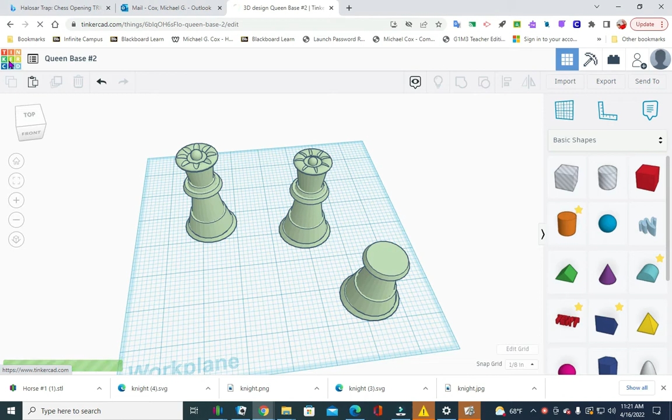We are going to work on our queen base today. I know some of you call it king base, queen base, but both of them are going to be the same base. So I'm going to go ahead and start by creating a new design.

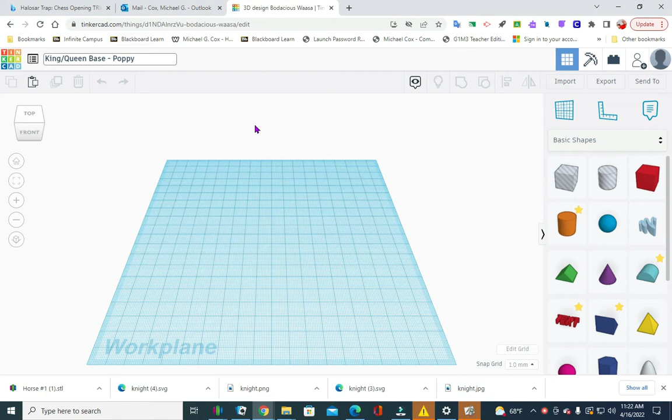I'm going to put king/queen base, and I'm going to put my name, Poppy. You guys go ahead and put your own name. I know some of you will still put Poppy - I don't know if you're being smart or just following instructions. Alright, next thing we're going to do is change the grid from millimeters to inches.

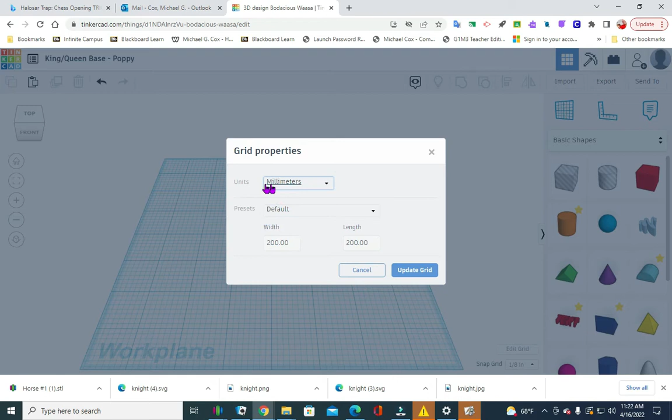I don't understand why this seems to be so difficult for some people, so I'm going to just show you again. I'm going to come down to this corner of the workspace, click on Edit Grid, change it from millimeters to inches, units inches, update.

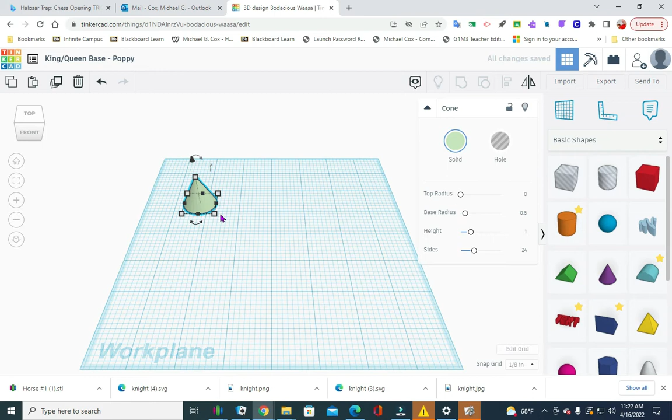So the first thing we're going to do - now I've been making adjustments to this as I go along. Each time it seems, when I print it out, I notice some things we could have done better. So I'm going to pull out a cone, change the color to a lighter color because it's easier to work with, and change the X and Y parameters.

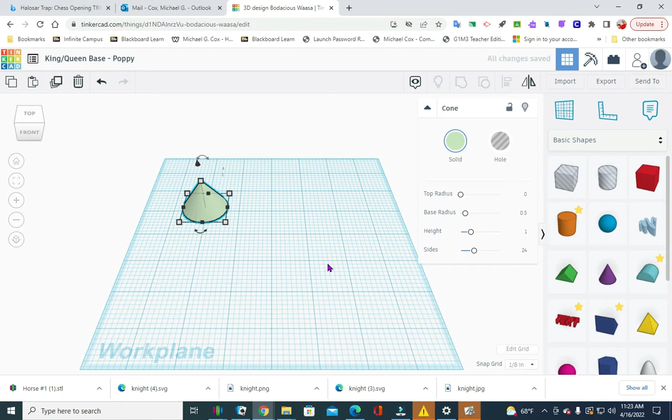to 1.375, 1.375. And I'm going to leave that there, I'm not going to change the Z-axis.

I am going to pull out a hole cube, the transparent ones. I'm going to hold my shift key - I've learned something new, that if you hold your shift key and move one of the parameters, it changes at equal amounts. So now this cube is actually all the same size without changing all three of them.

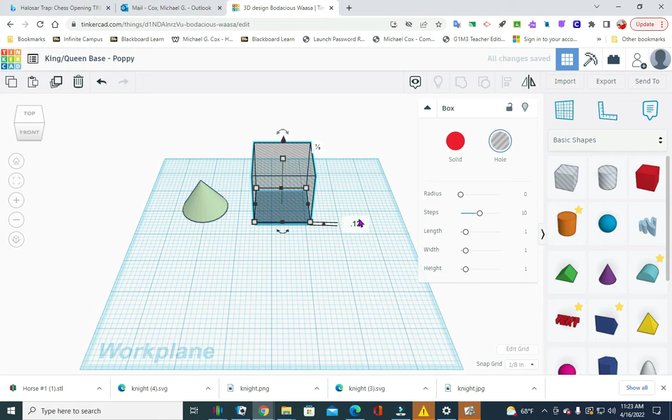I'm going to raise it up 0.125. Right now, I'm hoping that you know how to align. Make sure your handles are off. I'm going to put the two pieces pretty close together.

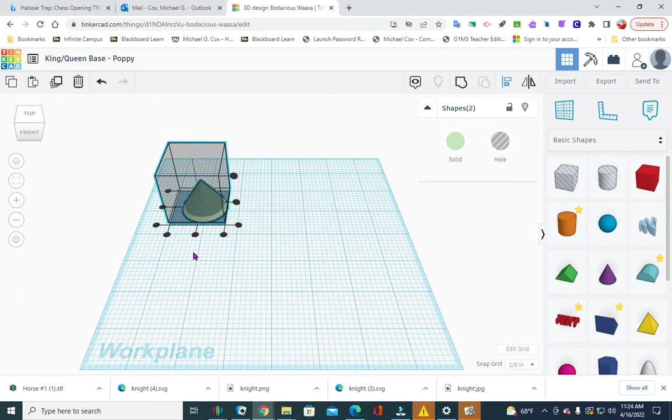I'm going to drag a rectangle over it. Remember, you don't have to make the big rectangle to get it all, just a small skinny line that goes through both of them. I'm going to click on align up here, and align on the X and Y axis. You see that turn gray - that means that they're both lined up. And I'm going to group.

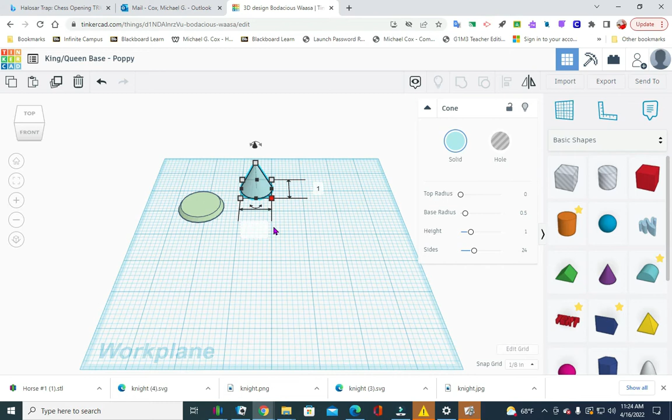Next, we're going to bring out another cone. Change the color, can make it a different color, just make it a lighter color. This one's X and Y is going to be 1.25 - let me double check, 1.25, 1 1/4, 1.25. And I'm going to change the Z-axis to 2.5.

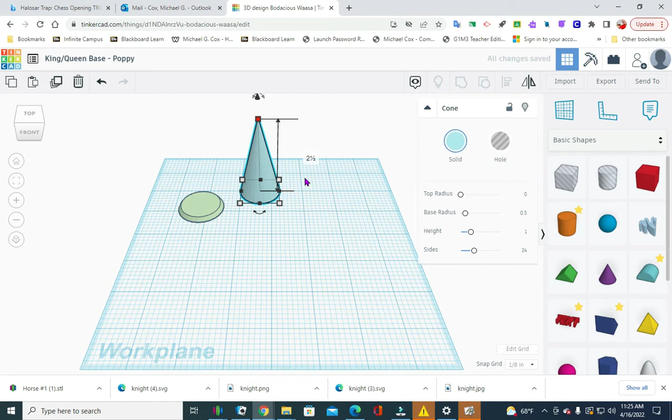I am going to bring out another box. Again, I'm just going to hold my shift key and drag this out a little bit, larger than 1.25, and then raise it up 0.5. My notes are here next to me. 0.5.

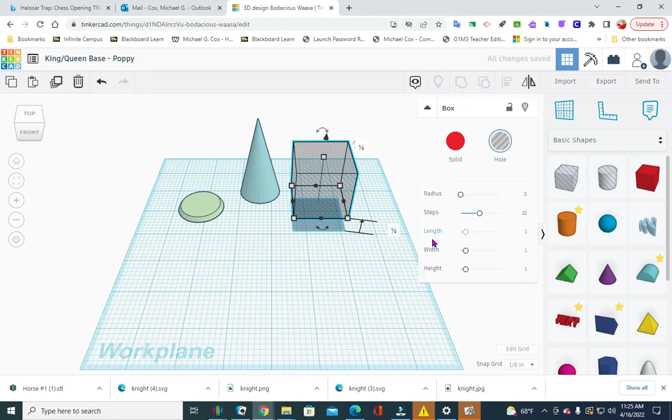I'm going to turn the handles off, make sure I align those. Oh look, I didn't - my hole block is not tall enough, so I'm going to click on that and just drag it up some, make sure I get all of it out of there. And now I'm going to align and group.

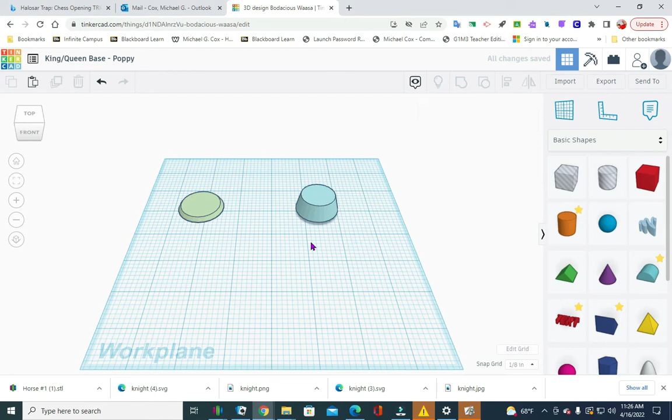And this is our secondary base for our queen. So we're going to raise that up 0.125, drag it over to the first part, and I'm going to align that and group.

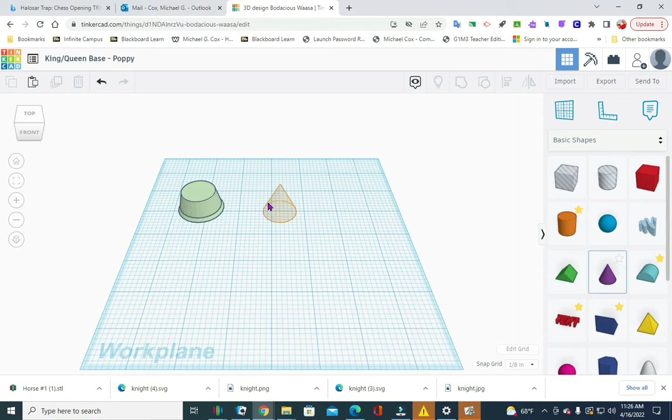Okay, that looks pretty good. We are going to pull out another cone. I'm going to change the color to a lighter color, and change the X and Y to 0.9, 0.9. And we're going to change the Z-axis to 3.

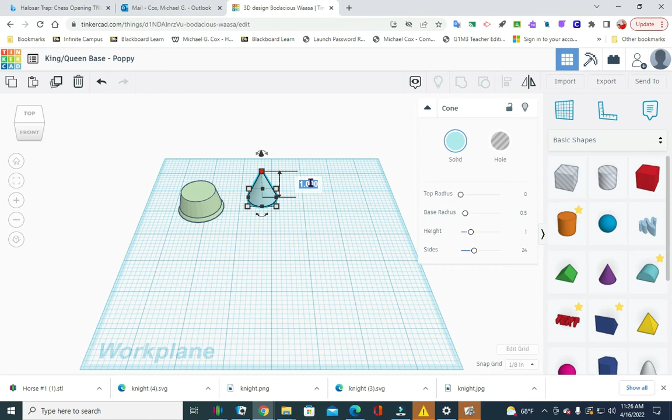Okay, I'm going to roll out this to get a better view. I'm going to pull out another hole block. We don't have to change the bottom, but we do have to change the Z-axis to 3 to make sure that we get the whole extrusion. Now I'm going to raise it up 0.7 - no, excuse me, 0.65.

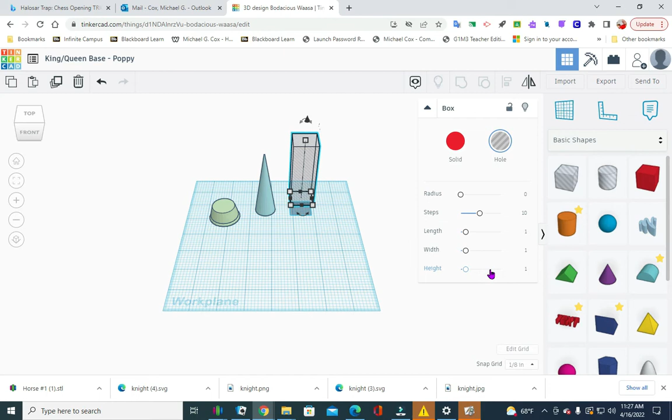0.65, .625. Okay, I'm just double checking to make sure I have this right. Alright, and then I'm going to align those - you guys know, you just put a thin rectangle around them. I'm going to combine.

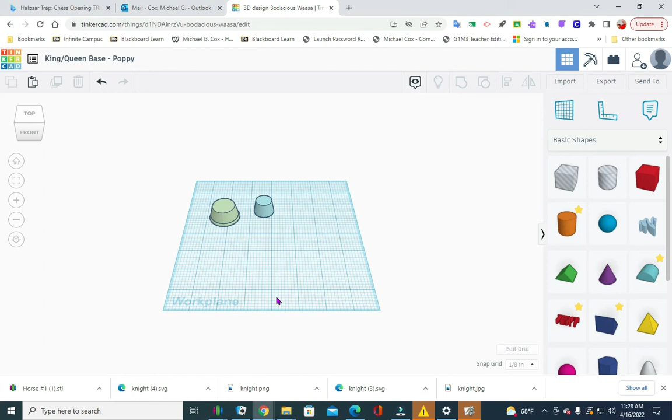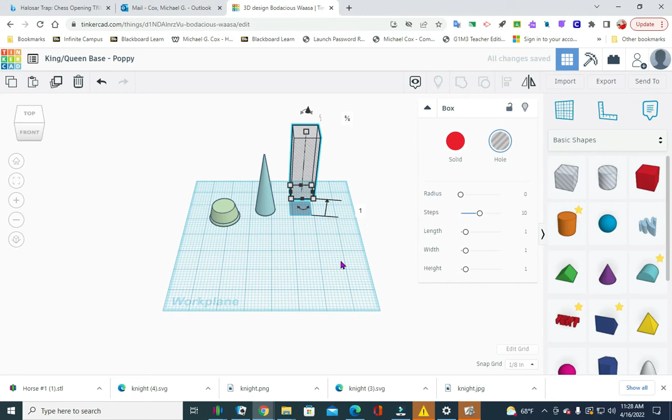Now I'm going to check my height - 0.625. You know what, I'm going to go back. I'm going to undo, undo again and again. I'm going to actually raise this up to 1 inch. Now I'm going to align them. Sometimes I'm looking at too many notes - that's why I made that error.

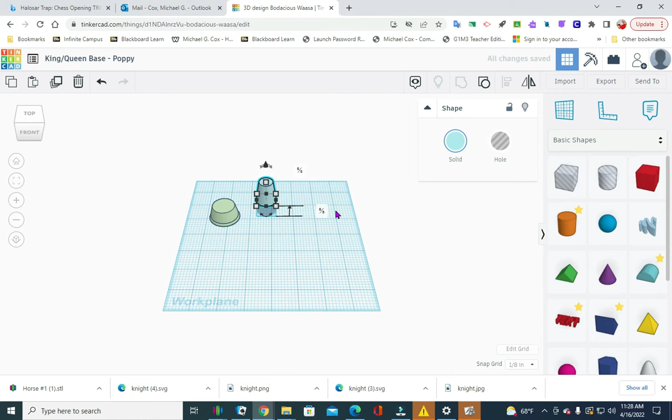But I'm going to fix it before I get too far along. Looks good, group. Now I'm going to raise it 0.625 - that's where I got my 0.625. Raise it up, 0.625. And then I'm going to turn the handles off, align, make sure that's perfectly in the center. I'm going to group, and now we're almost done.

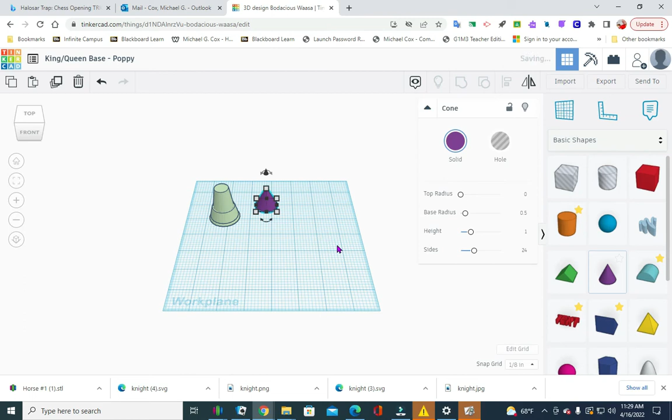So I'm going to pull out another cone, change the color - let's make it something different. And I'm going to leave that at 1, and change the Z-axis to 0.1.

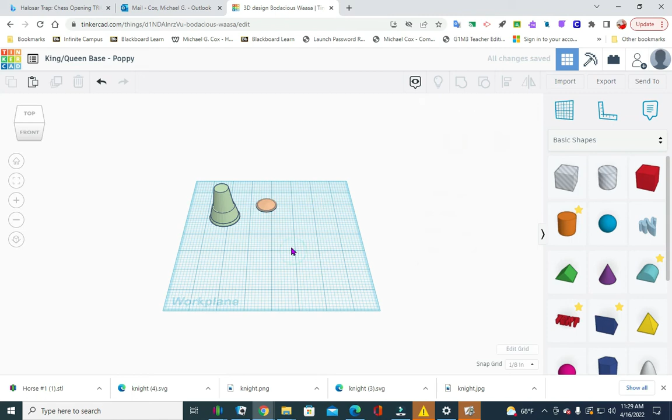And now I am going to raise that - I have to check the height, it should be 1.625, there you go. So I'm going to roll in, and I'm going to raise this up 1.625.

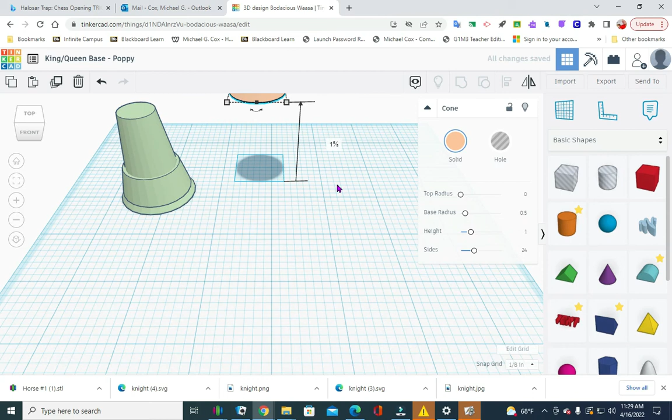I'm going to slide it over on top, and you guys know the drill. We're going to align them and group them.

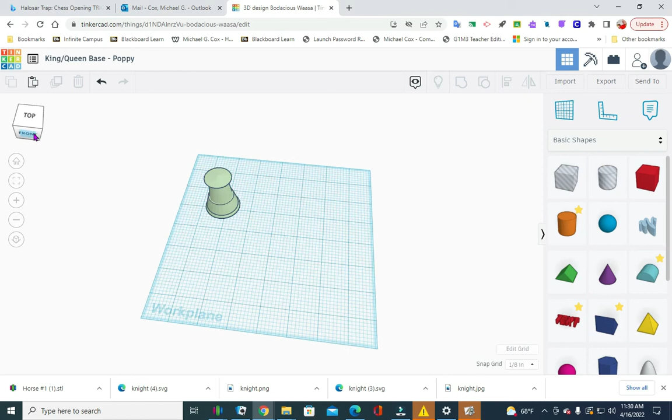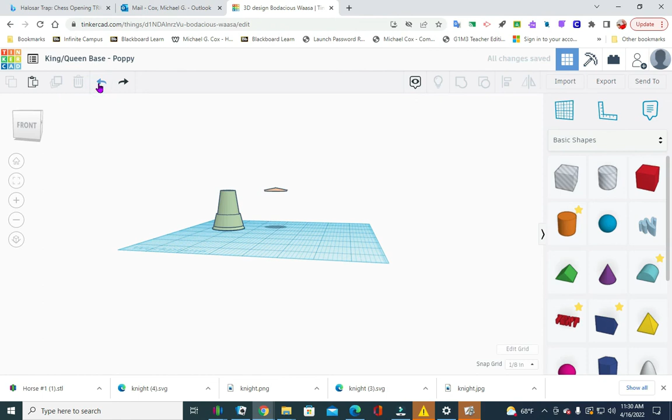I think it's a good idea - I'm not sure if I even like that either. I'm going to undo that. I just keep undoing until I get it where I want it to be. Alright, again, I'm going to undo.

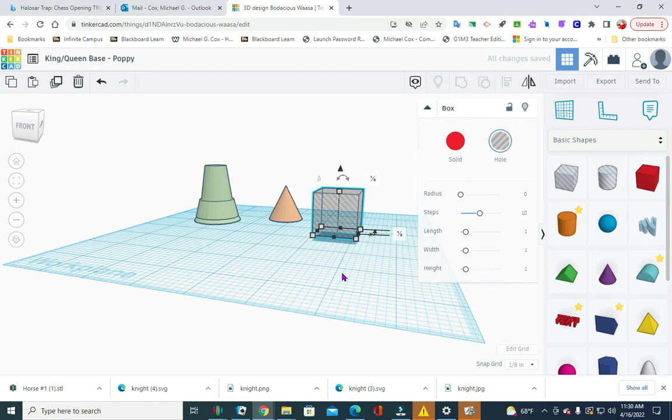And there we are. Now what I need to do, I need to cut off that top - this is what I did wrong. I'm going to raise it up 1/8 of an inch, .125. Then I'm going to align and group it.

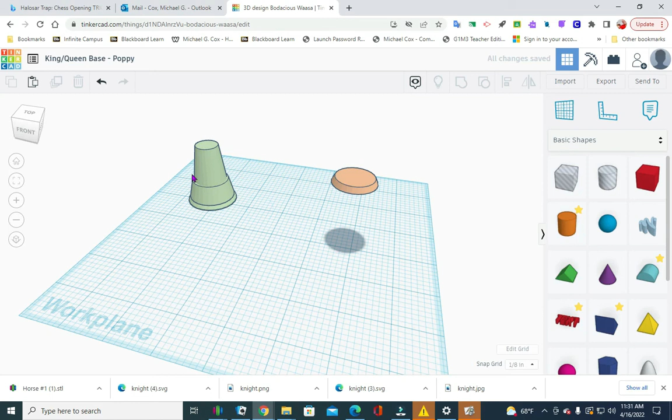Now I got to raise it up - see, I needed that flat bed. Raise it up, 1.625, slide it over. Now we can finish it up. Alright, there we go, now we got it. And that's it - that's our king queen base.